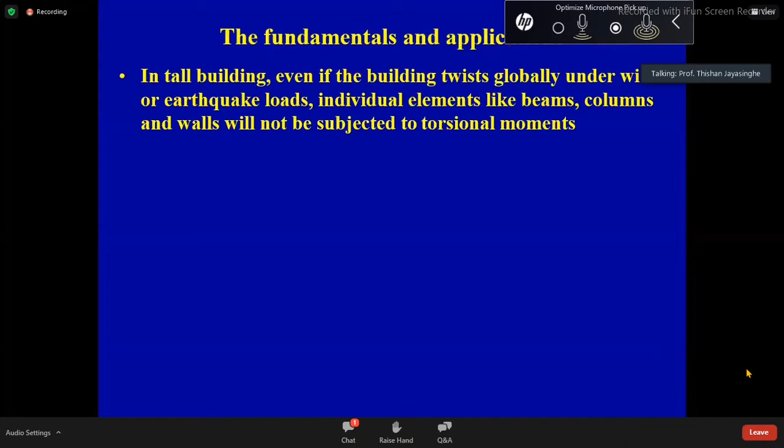So when you have tall buildings, when we make models, we have to have a good understanding of the behavior. So when you have a very tall building, the building can twist. And what are the repercussions of twisting on individual elements like beams and columns? Can they be subject to torsional moments? The answer is no. Even if the building twists, individual members will not be subject to torsional moments.

The reason is torsional moments have to be resisted by concrete and reinforcement, and reinforced concrete sections are not very good in resisting torsion. Same with steel sections. So if you have steel columns, concrete beams, or steel beams, they are not very good in resisting twisting. And if you are going to have twisting, then we have to be careful.

The beam elements will bend only about one axis. They will not have biaxial bending. And columns will carry mainly axial loads, and when you have very large columns, the moments acting on the columns will not have much influence.

Concrete walls will be very strong in carrying in-plane loads, but out of plane they are not very strong. So if you are expecting some out of plane loads on walls, it's better to go for thicknesses like 300 or 350 millimeters, so that the effect of out of plane movements will be negligible.

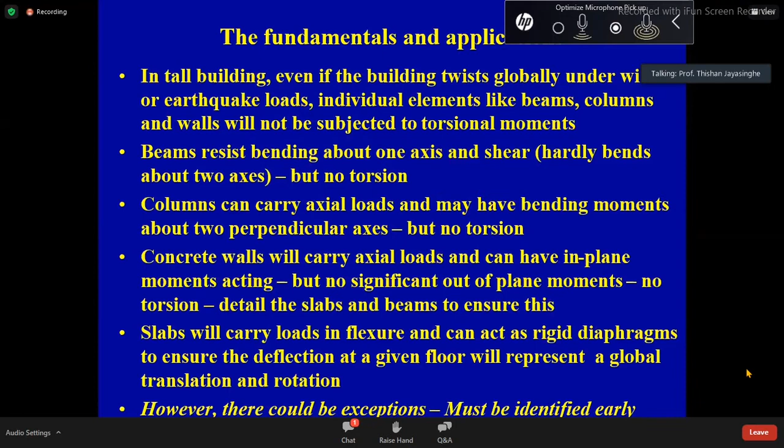And although these rules are there, there can be exceptions, so we must identify them early. And then there are so many other behaviors, because we have been talking about static behavior, but there are dynamic behaviors too.

So when it comes to designing, we have to see what a three-dimensional model can give us. A three-dimensional model can give us the natural period of vibration of the building, and we can also get earthquake analysis and wind analysis results, good results from the 3D model. We can also get loads on columns, diagrids, and so on.

And also, if we are having transfer plates, we can get loads, bending moments, and shear forces on transfer plates. But the 3D model will not tell us anything about slab design. And 3D model results cannot be used for beam design, because we are not getting the pattern loading that the codes recommend us to consider when designing beams.

So when you make a 3D model of a structure, you can have walls, transfer plates, pile caps, and when designing columns, you can have load reduction factors, and they are all allowed in both Eurocodes as well as BS codes. But the time has come for us to stop using BS codes and move fully to Eurocodes.

We hope very shortly CIDA will issue a directive saying that all building designs in Sri Lanka, and any other structure design in Sri Lanka, should be carried out according to Eurocodes. And if you look at the Road Development Authority, you will already see that it requires all their designs to be done according to Eurocodes.

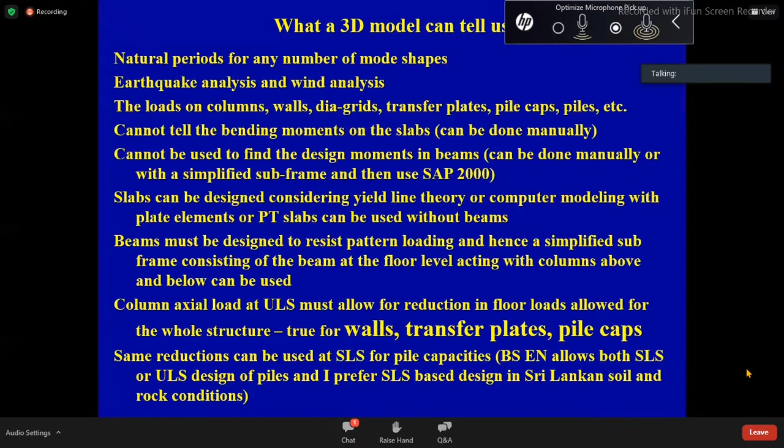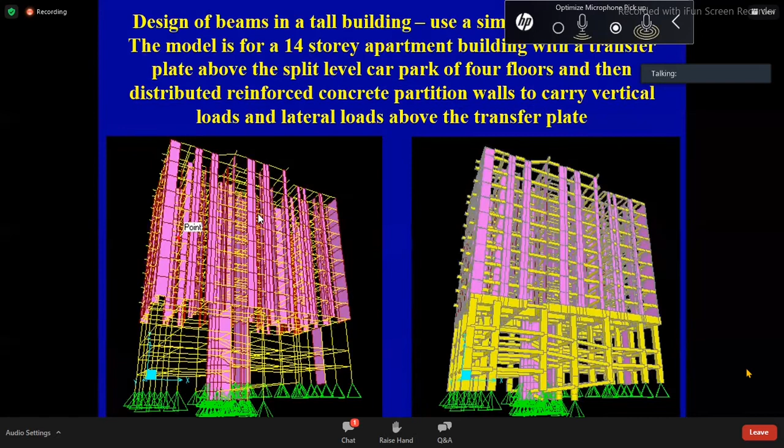And when you're analyzing a beam, one of the assumptions we make is that the beam is supported by a column, and the column does not settle.

That type of assumption would be pretty good for 2-story, 3-story, 4-story type buildings, but when it comes to tall buildings, you can have differential shortening of columns. Differential shortening means different adjacent columns can shorten by different amounts due to the variable axial forces acting on them.

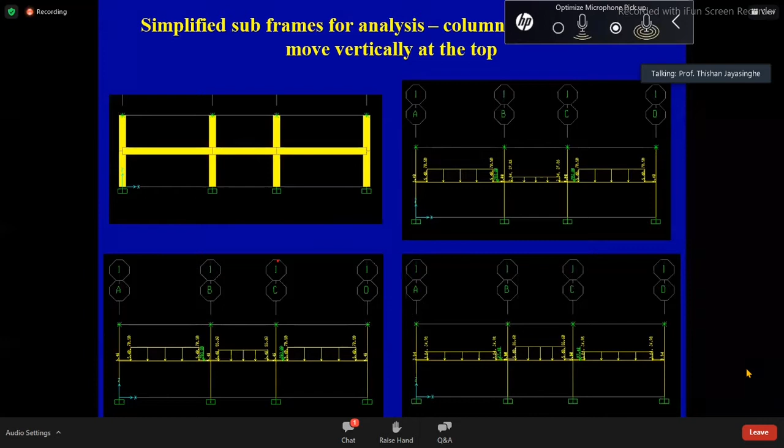And if that is going to happen, we should not just use a simplified model like this with pattern loading. We must look at it in a more logical manner, because we are not including the wind loads in such a simplified analysis.

Even if you have included simple wind loads, you'll still find that differential shortening should be given some consideration. So when designing, you look at the bending moments, but also consider the possibility of plastic hinges forming close to the columns that can increase the span moment.

So my general tendency is, if I am doing designs, I tend to over design the beam section in the span, but I do not over design the beam section at the support.

The reason is all the codes allow a certain degree of moment redistribution at the columns. Because of that, I don't really worry about the bending moment at the column, and also the effect of bending moment at the column due to differential shortening - that I won't worry too much about.

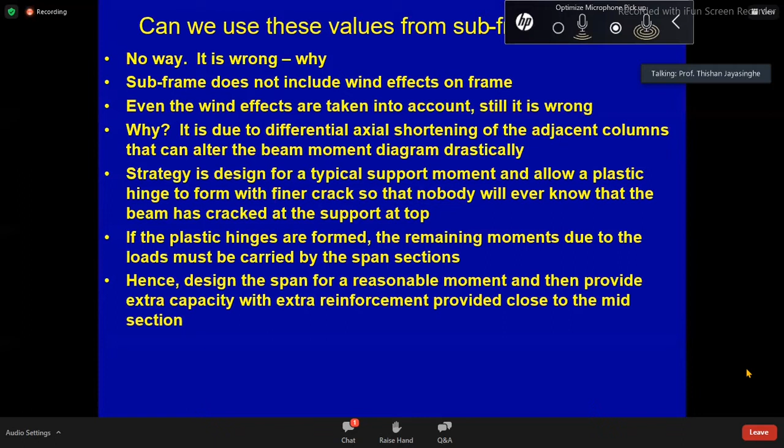But to account for all these unforeseen effects, I will over design the beam in the span section by about 10-15%, or sometimes 20%.

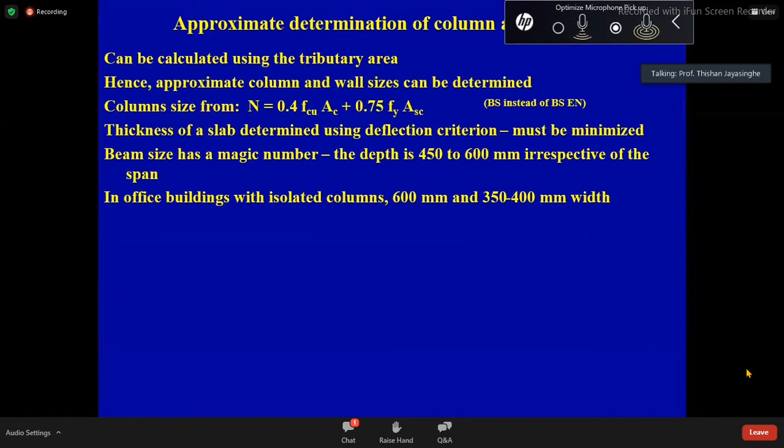When it comes to the design of columns, you can always use the tributary area and calculate the loads on columns, and beams also can have different sizes. So basically, it's possible to select beams, columns, and all the structural members in a tall building using simple calculations. But there's a big difference between a 2-story building and a 40-story building.

In a 40-story building, in addition to doing the calculation, we must take some assessment of risks. Risk assessment is a very good initiative - you should train your mind to always be inquisitive and ask questions.

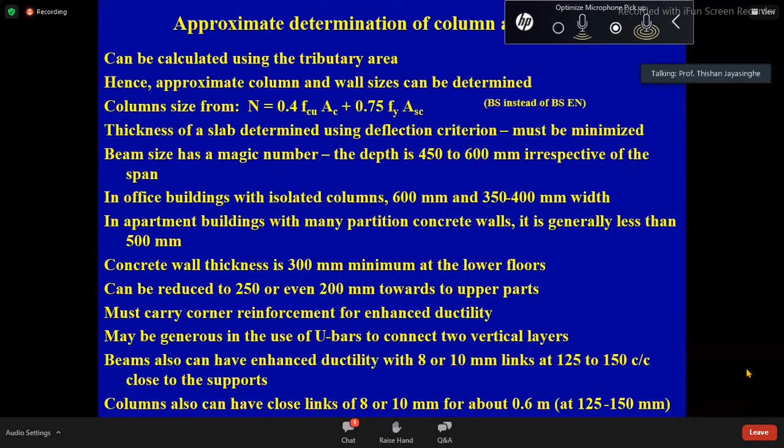This building is very different to a 2-story building. I have designed 2-story buildings, but today I'm designing a 40-story building. What can go wrong in a 40-story building that you do not get in a 2-story building? You have to always think about it.

When you are designing tall buildings, we have another challenge: just because we have risk, we cannot over-design everything. We have to be accurate with our designs.

So how we optimize the building is we look at the structural elements that cannot go wrong, and we also look at the elements where things can go wrong. If you take a normal building with beams, slabs, columns - slabs cannot go wrong, so we optimize the slabs.

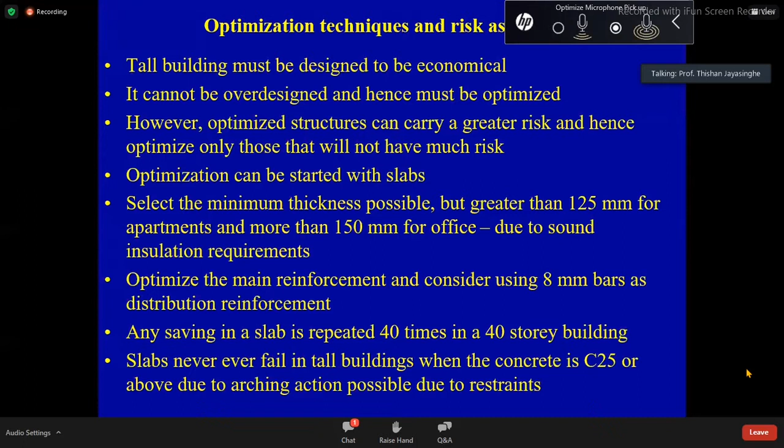In beams, things cannot go wrong at the support, but beams can go wrong in the span, so we over-design the span but not the support. We also look at shear carefully, and try to see whether torsion occurs. Then when it comes to slabs, we optimize as much as possible.

But when it comes to columns, in the top part of the building it's not a big problem, but in the bottom part of the building we'll be very careful with the columns, because if anything goes wrong with a column in the bottom part of the structure, things can go wrong drastically.

We have seen one building collapsing in Miami, and nearly 100 people died. That type of collapse is totally unacceptable. That collapse would have occurred due to engineers underestimating the effects of construction sequence on the structure - I think that is the final finding of the teams.

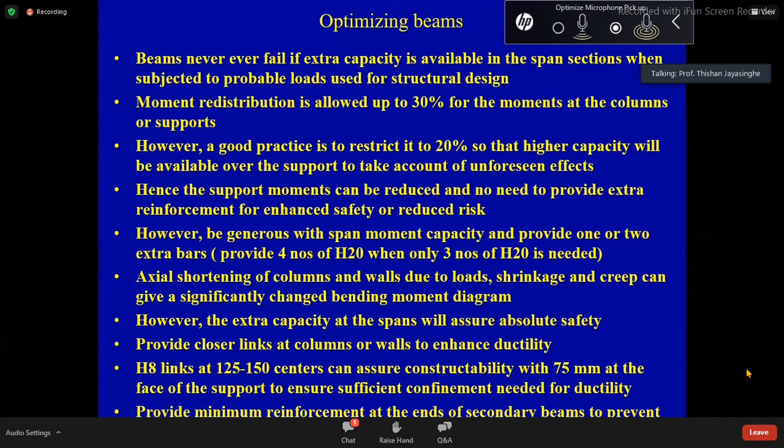So basically, when you are designing, you have to do a risk assessment to see which element can fail. Any element that you think has a tendency to fail, you provide extra reinforcement and extra moment capacity and extra shear capacity. And if you think any element can be subjected to axial shortening and induce plastic hinges, then rather than using very large diameter bars, you use a number of small diameter bars so that cracks will occur, but nobody will see the cracks.

So likewise, you have to get a deep understanding of the behavior of the structure and then do the detailing, rather than blindly doing the detailing just by looking at the reinforcement area, say it's 880, then just providing 2 bars of 25 diameter because each 25 diameter bar is 490 millimeter square. That type of calculation is not acceptable.

You always have to see what the spacing is, the maximum spacing between bars, and whether it's better to have bars at a closer spacing than a larger spacing. If the area is 880, you might see whether it's better to use 3 numbers of 20 millimeter bars than using 2 numbers of 25 millimeter bars. Not to save steel, but when you have 3 numbers of bars, the crack widths will be smaller. So even if something goes wrong, still nobody will see any cracks, and no cracks means no investigation, nothing to worry about. So likewise, you have to think about it.

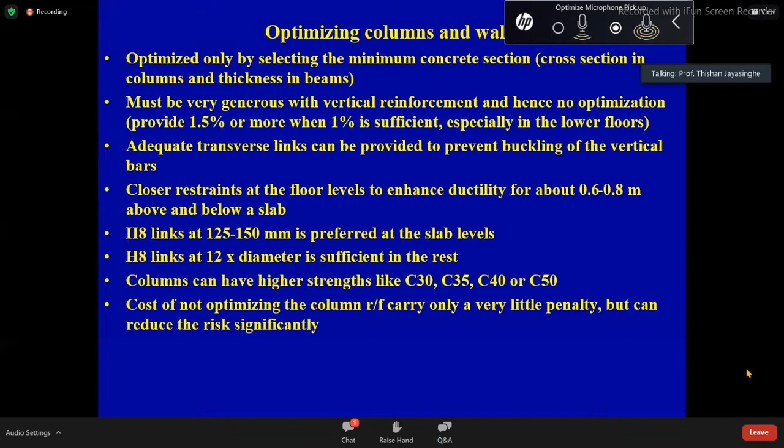And when it comes to columns, always you will see the possibility of columns failing due to providing too little reinforcement. And you will do a risk analysis and then again see at which level you have to provide special additional reinforcement. And when it comes to concrete, also the same.

It's always good to use high strength concrete where necessary. But if you are using large sections like in a transfer plate, that means the structure is not optimized. So in such a situation, there's no need to go for high strength concrete for transfer plates because the structure is not optimized - we are using huge sections because the load transfer needs huge sections.

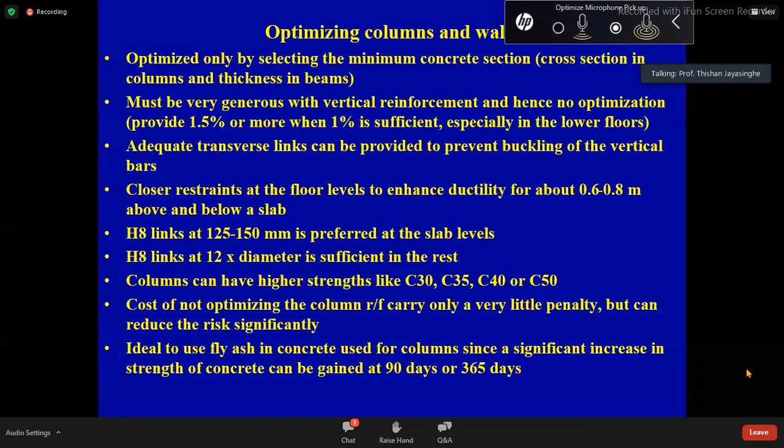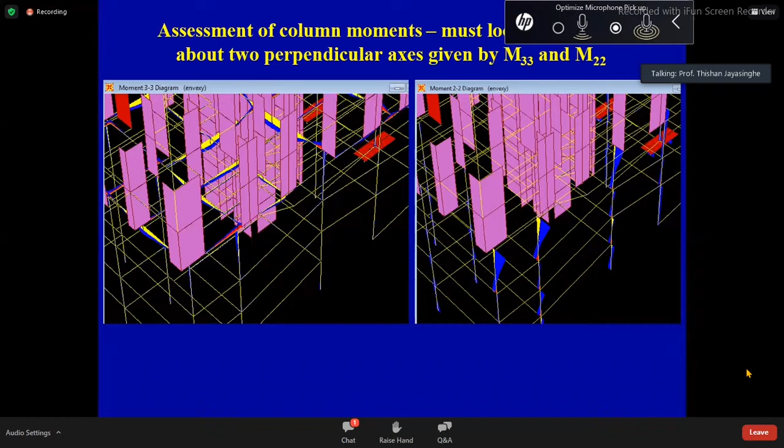And then when you are designing, again, you have to be very careful. If you look at this particular column, you can see this is M33 and this is M22. Generally we look at M33 all the time, but in this particular case M22 is massive. So you have to always look at all the different moments, forces, every moment. You should not think, okay, I always look at M33 and I'm going to look at only that in the design.

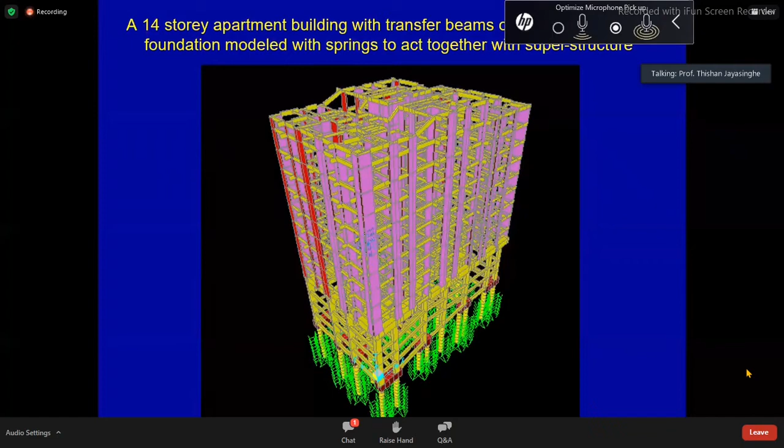You must always look at all the different moments. And you can see when you are modeling in Sri Lankan conditions, it's always possible to model the superstructure with the substructure. This kind of modeling is totally acceptable because we are having bedrock. We are having bedrock, so you can model the superstructure and substructure all together, and you can get accurate results.

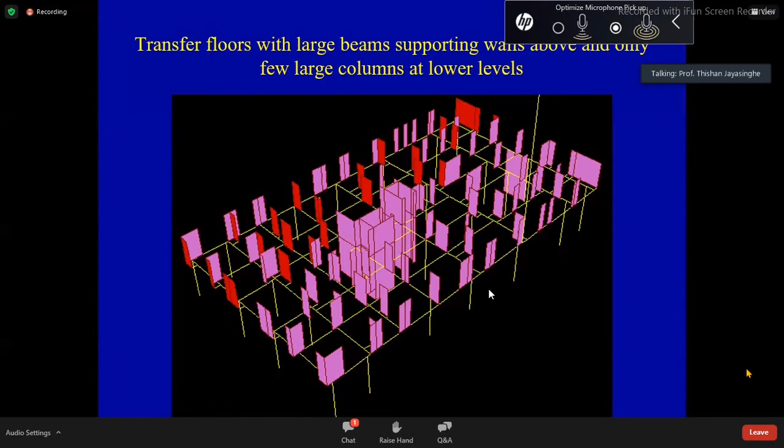And also you might get situations where transfer plates are there, and some of these walls are not on the beam, not at the center of the beam - some of these walls are on the side of the beam. Here you can see again some of these walls are not on the beam, they are away from the beam, which means some of these large beams can be subject to torsional moments. If you look at some of these beam locations, you will see they are not at the center of the beam - the wall is on the side of the beam. That means the beam can be subject to torsional moments in addition to the bending moments.

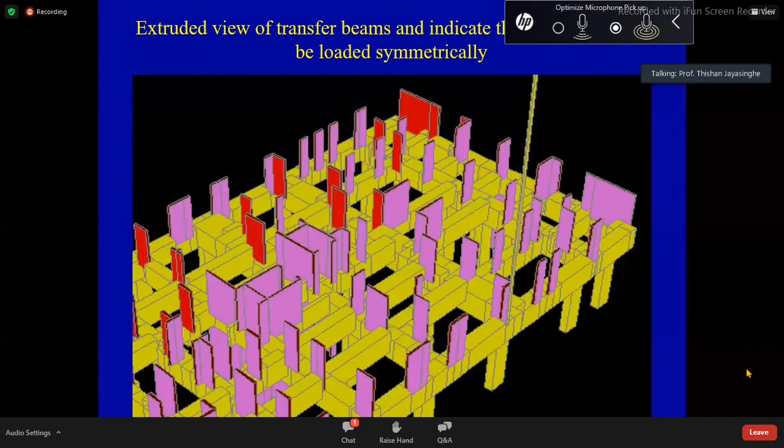To take account of that, you have to design the beams for torsion, and most of the time we don't design beams for torsion, but when it comes to transfer plates, you have to design transfer plates for moments. So you can get torsional moments, additional reinforcement, and sometimes you will find the shear links are not 10 millimeter now, they are 25 millimeter diameter bars. These shear links are not shear links, they are torsional links.

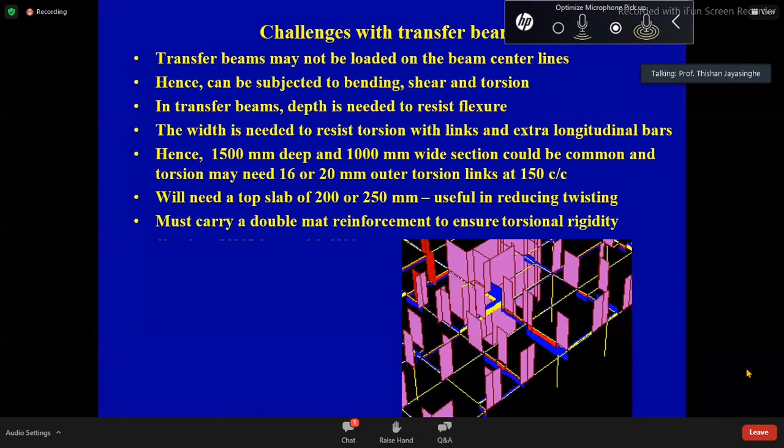You have to develop a good understanding of different design aspects, because most of the time students learn only to design for bending and shear. You must also learn how to design for torsion. And when you have massive sections, we have a different problem called delayed ettringite formation, which also should be paid attention to.

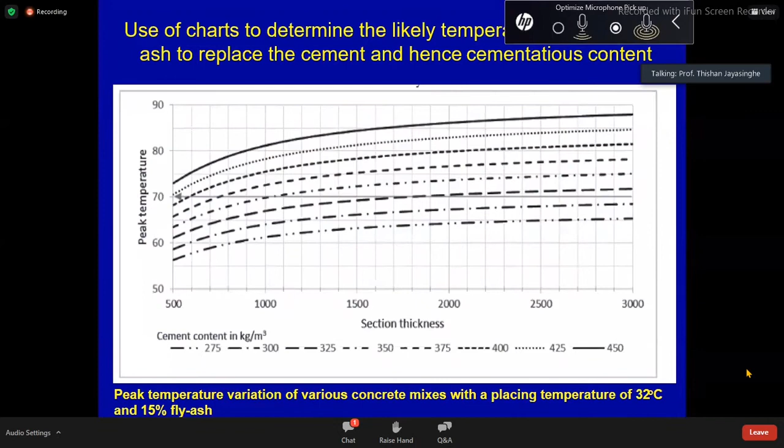To help sort this out, we have developed a set of curves that will help predict the maximum temperature reached by different types of concrete mixes. You can download this paper by typing M.T.R. Jayasinghe DEF, delayed ettringite formation, and read the paper.

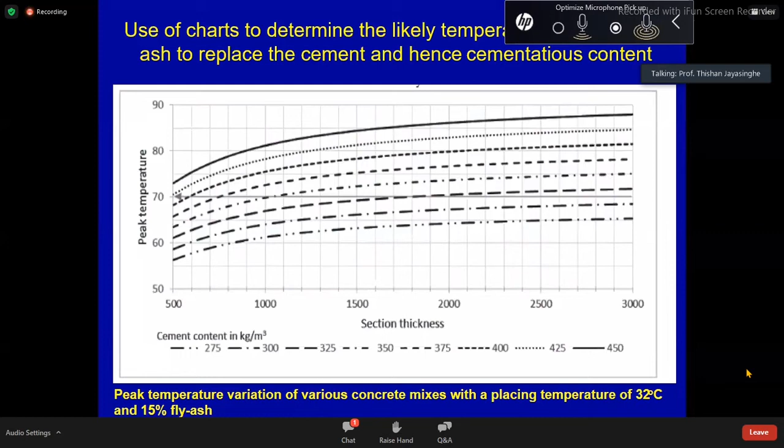We have solved one of the biggest problems that all engineers faced. These days you can easily use this paper to predict whether the temperature will go beyond 70, which is given as the margin, and see how the concrete mixes you select will give maximum temperatures above or below 70.

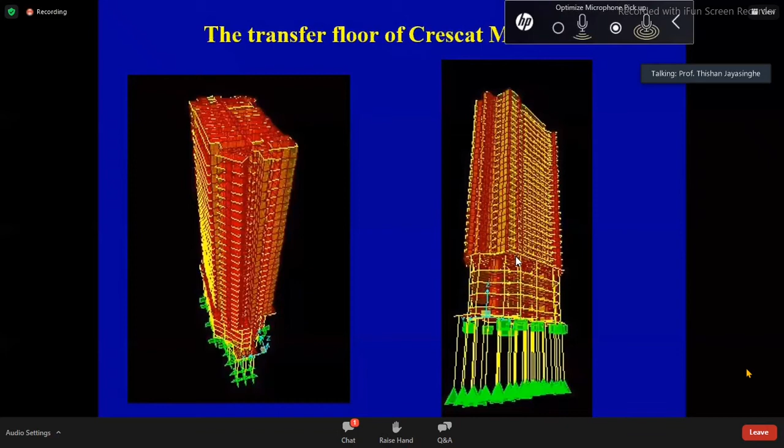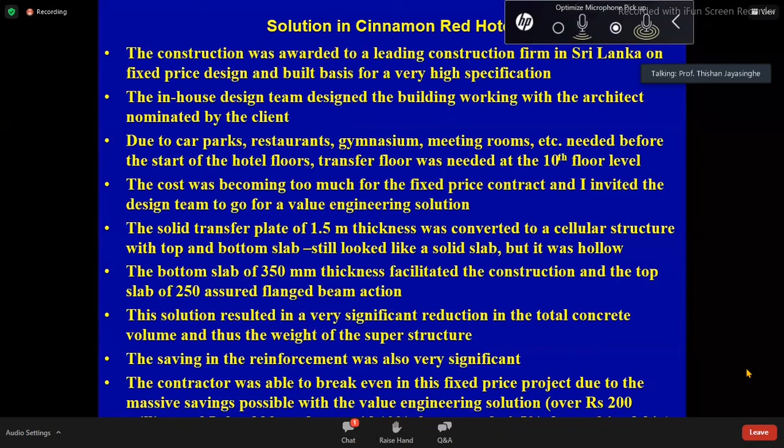Another classic example is a transfer plate at the 10th floor, in the Cinnamon Red Hotel. When you enter at this level, you go to the 7th floor, and at the top of the 7th floor you get a restaurant. Above all that, you get a transfer plate at the 10th floor level.

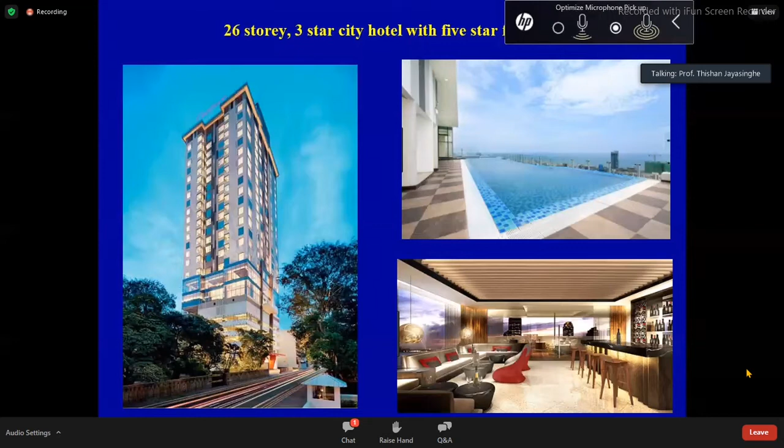To cast a transfer plate at the 10th floor level, the biggest problem is the weight. We solved that problem by going for a cellular raft, a cellular transfer plate, where we cast the bottom part of the transfer plate first, then formed the voids, and then cast concrete around it. That way we saved a huge amount of money.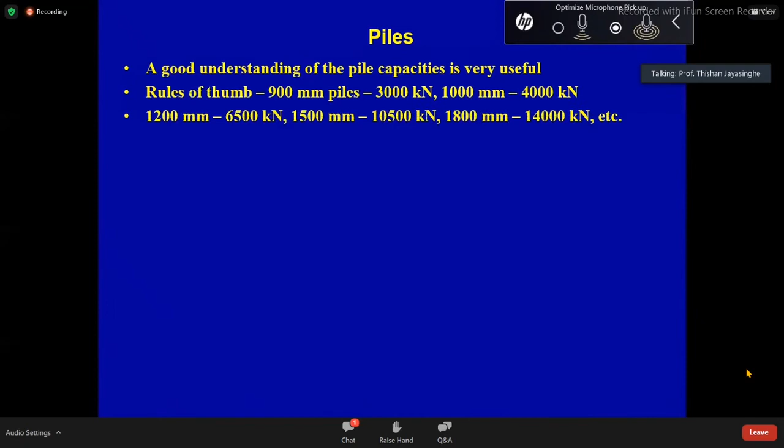The saving in that particular building from the original design had been about 200 million rupees, which made it a profitable venture for Sankhya Lanka, the owner of the building.

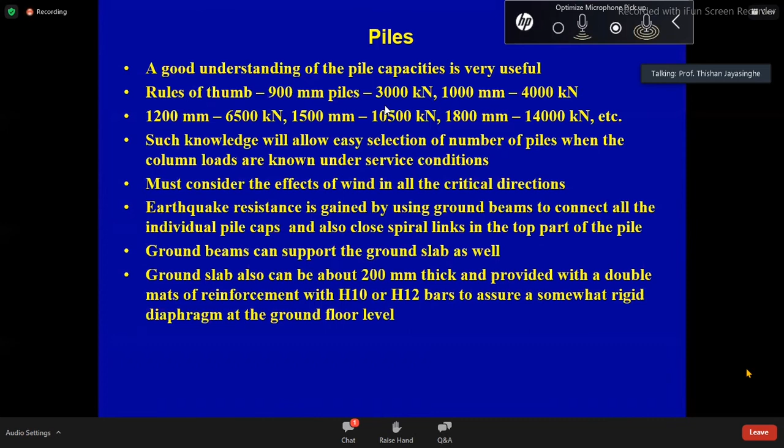When it comes to piling, again we have rules of thumb. For different pile diameters we have different capacities, but these are for normal situations. When it comes to super tall buildings or large buildings, simple pile calculations are not applicable. You have to go deep into it and see how much extra socketing is needed to deal with skin friction. Using the ICTAD guidelines is again too restrictive; you cannot rely on ICTAD guidelines.

So what you do is go for pile load testing, PDA testing, and maintain load testing. A normal guideline for a 1,200 millimeter pile is 6,500 kilonewtons, but in Altair we use 11,000 kilonewtons for 1,200 piles. For 1,500 piles, the normal guideline is 10,000 to 10,500 kilonewtons, but in Altair we use 17,000 kilonewtons.

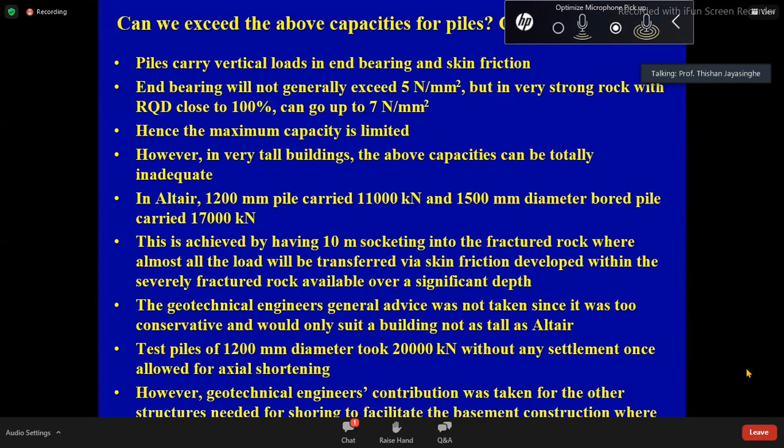When the structural engineer said he wanted to use 17,000 kilonewtons for the 1,500 millimeter pile, the geotechnical engineers did not like it very much, but we said unless we can use 17,000, we cannot have such a tall building, whether they liked it or not. We did load testing, maintain load testing, and PDA testing, and decided the pile load carrying capacity based on those tests rather than theoretical predictions.

We found that our guess was better, that the maintain load testing and PDA testing proved that our value was actually proper, rather than using very low values.

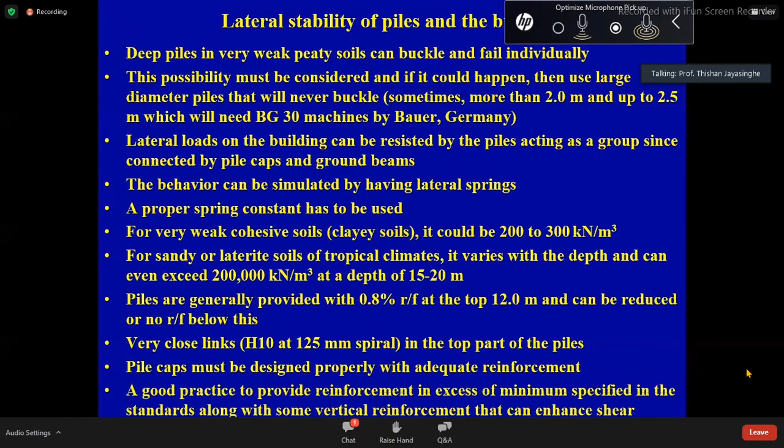You also have to think of piles in weak soil conditions and the lateral stability of piles. For that we can use spring methods, and we teach these methods to geotechnical engineers even in the final years of Moratuwa. Those taking large structures learn those theories, and for their comprehensive design projects they use not only their own lecture notes but even the MSc notes, because we expect students to go deep into the subjects rather than finishing at very shallow levels. You can have springs representing the soil conditions and so on.

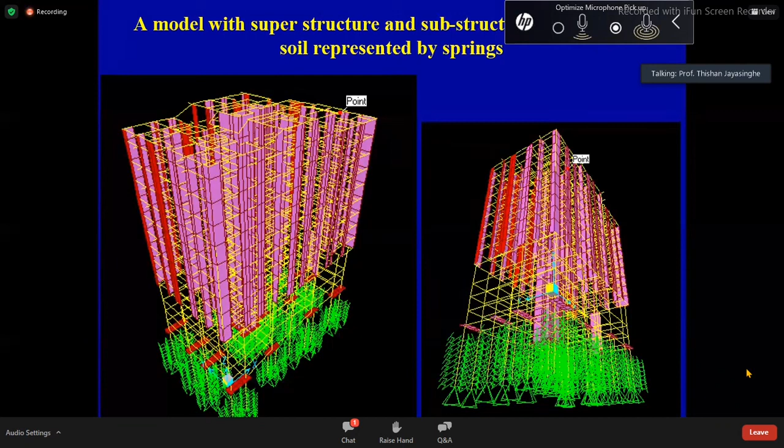So there is a lot of information, a lot of things you have to do that you do not generally do for a 5-story or 6-story building when it comes to tall buildings. But these are not super tall buildings, these are tall buildings, something like 20, 30, 40 story range.